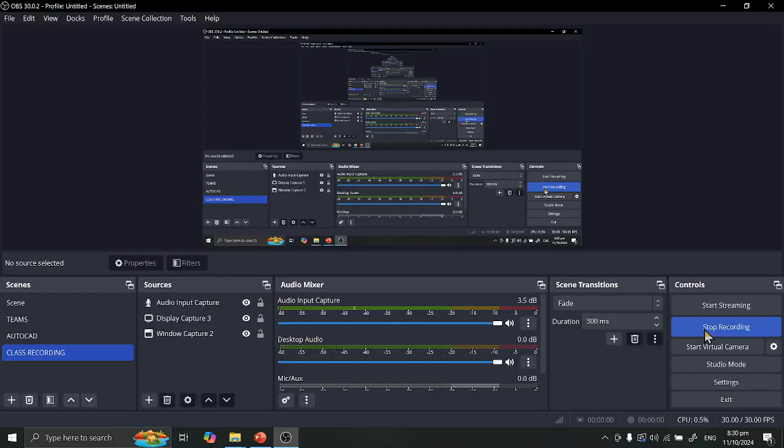Okay, to carry on with our discussion, we have sample problem number 1. So this is our situation: when the total pressure acting at the mid-height of the consolidating clay layer is 200 kilopascals, the corresponding void ratio of the clay is 0.98.

When the total pressure acting at the same location is 500 kilopascal, the corresponding void ratio decreases to 0.81. So three things are being asked. First, we have the compression index, which in our notation is CC. Second, compute the void ratio of the clay if the total pressure acting at the mid-height of the consolidating clay layer is 1000 kilopascal. And then the coefficient of compressibility, which is our A sub V.

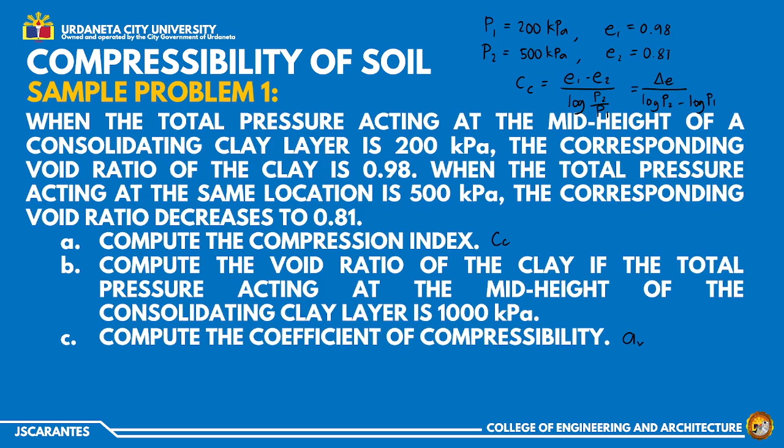For the last part, what is being asked is the coefficient of compressibility, that's A sub V. We said A sub V can be expressed as the change in E divided by the change in P.

Pagdating kay undisturbed clay, meron tayong formula for CC: 0.009 multiplied by LL minus 10. Dun din pasok yung paggamit ng given na LL. Take note sa mga problem, kadalasan kailangan natin magamit yung mga binigay talaga. Actually, most of the time, lahat ng binigay na given is nagagamit talaga.

Pero mag-ingat pa rin kayo, kasi meron pa rin mga klase ng problem na nagbibigay ng given pero hindi naman kailangan gamitin. Yun yung mga tricky type questions. Doon natin magagamit yung LL na 40%. Salpak lang natin dito: 0.009 times liquid limit na 40 minus 10. Yan is for undisturbed clay. Type lang natin 0.009 times 40 minus 10, we have sakto 0.27.

And then, okay na. So, pwede na tayong mag-substitute dun sa ating main formula. So, CC natin ay 0.27.

And then dito pala kay thickness. Pagdating kasi kay settlement, medyo maliit lang yung values nito. Kung papansin nyo, ginamit natin na unit for the height or thickness ng layer is meters. Kasi pag settlement ang pinag-usapan, sobrang liit niya. Kadalasan, para mas maging appreciable yung value, minsan nilalagay natin naka-cm or naka-mm. Pero dito, para mas sure na lang, gagamit tayo ng naka-millimeters na lang.

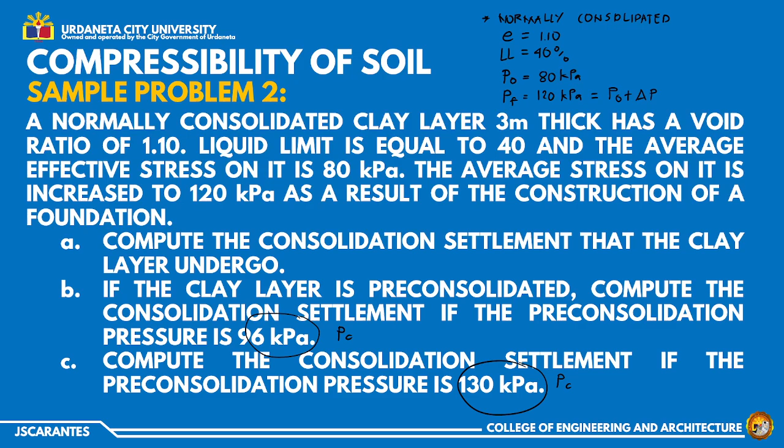Si CS, wala ulit na banggit. Pag walang nabanggit, di ba meron tayong note, binanggit natin yung formula ng CS: if ever hindi given or walang information about swell index, it is taken to be equal to CC over 5, or 20% ng compression index. Ang compression index natin, ito siya, 0.27. Divide natin yan ng 5, this is 0.054.

Salpak natin doon sa ating formula. SP is equal to... ganun, tulad ng ginawa natin kay part A, naka-mm na lang para mas appreciable yung value na mapalabas natin. H over 1 plus 1.1, multiply natin ng CS na 0.054, logarithm. Ang PC natin ay 96, divide natin ng PO na 80, plus CC 0.27 logarithm PO plus delta P 120 divided by PC na 96.

Solve lang natin ito. And that is equal to 43.489 millimeters, so that's our answer for part B.

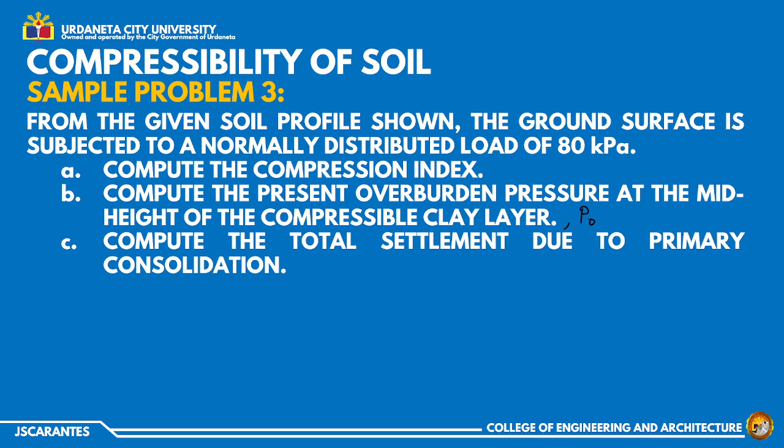For normally consolidated, mag-next slide na lang tayo. For part C, SP pa rin under normally consolidated: CC H over 1 plus E, logarithm of PO plus delta P over PO. Ang CC natin, nahanap natin kanina, that's 0.288, and then thickness ng clay layer. Sa figure natin, take note, yung H na ginagamit natin, huwag kayong malito: kapag PO, hanggang mid-height lang, pero sa formula natin ng SP, yung H na nandun is yung total thickness pa rin ng clay layer, so that's 4,000.

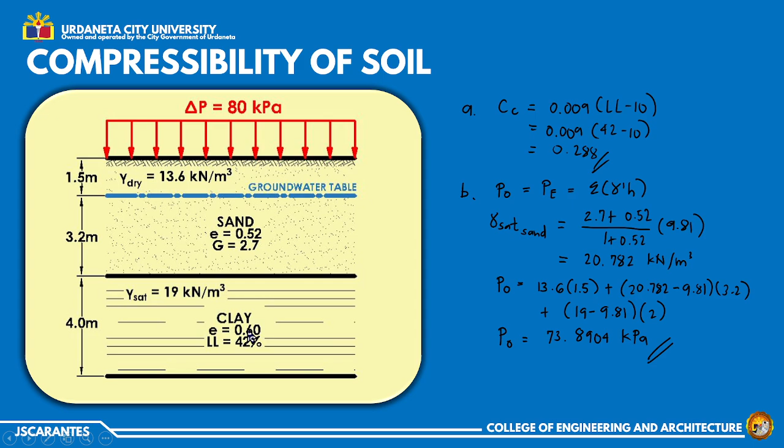Divide natin ng 1 plus. Tingin tayo syempre kung alin yung layer na kinoconsider natin, which is the clay naman, so gamitin natin yung E ng clay, wag yung E ng sand. Use E is equal to 0.60, logarithm. Ang PO natin, ito yung na-compute natin, we have 73.8904.

Dito natin ilalagay yung ating delta P. Ang delta P natin, according to the problem, is equal to 80 kPa. Para sa units naka-kPa, and then divided by PO, 8904. Type lang natin ito: 0.288 times 4,000 divided by 1 plus 0.6 logarithm of 73.8904 plus 80, over 73.8904.

Medyo malaki yung value since medyo mataas din yung thickness. 229.4089, let's just put 9 here, so ito ay mm. Yan yung ating answer for part C ng ating problem number 3. I hope nasusundan naman.

Let's try another. Problem number 4: the details of two footings and the soil layer beneath them are shown in the figure. Yung figure natin nasa next slide. Compute the stress increase at the center of the clay layer. Assume that the pressure beneath the footing is spread at an angle of 2 vertical, 1 horizontal. Ito yung ating rectangular stress distribution. Tinatanong ang stress increase, so pag sinabing stress increase, yan yung ating delta P, syempre.

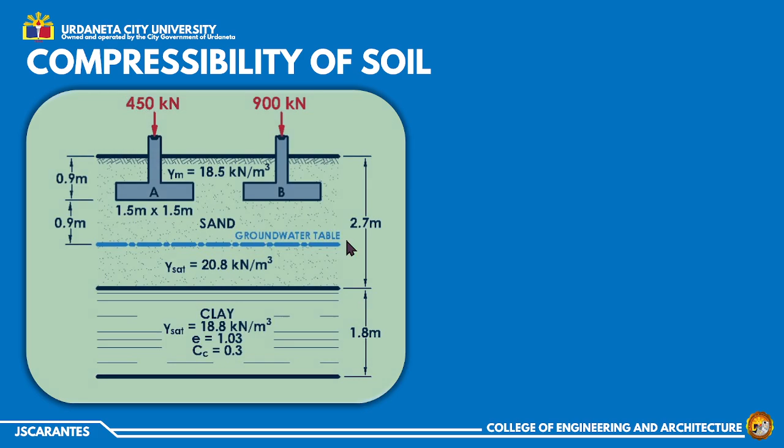So we have 51.282, wala namang butal na, that's kPa. Pwede tayong gumamit ng SP under footing A. Meron naman ng thickness, meron ding E, meron ding C, nandito yan lahat kay figure. 0.3, 1.03 for the void ratio, 1.8 thickness ng layer. So buong thickness ang gagamitin, 1,800 divided by 1 plus 1.03, logarithm. So ang PO yung na-compute natin, 51.282.

At since kay part B ang ginamit nating delta P is 25.51, adapt na lang natin yon: 25.51 divided by PO na 51.282. Compute natin ito.

Is equal to 46.6451, so 45 na lang, that's millimeters. So yan na yung answer natin for problem number 4.

At I think, meron pa tayong last example dito, problem number 5. May figure din ata, so meron nga. Dito, a rigid 3 meter square footing is shown in the figure. The bottom of the footing is 1.2 below the ground surface. So compute the elastic settlement.

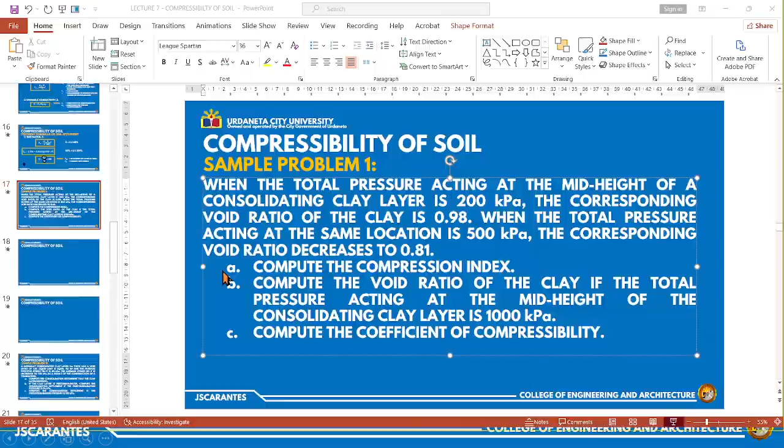so for this problem, siguro gamit na lang din tayo ng average, no? Since nagamit naman natin previously si direct na formula for delta P. Ayusin ko lang konti.

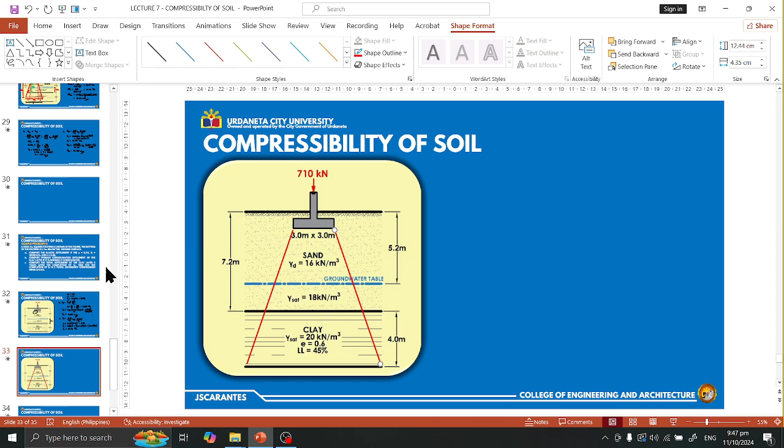Medyo tagilid, no? Pero gamit na lang ako ng line siguro. Mag-insert na lang ako. Ba't ko ba pinapahirapan ang sarili ko? From here to here, sagad na natin siguro sa gilid, no? Then gamit tayo kulay red, kapalan lang natin. Copy natin, mirror ko. Okay na siguro yan.

So ang ating slope dito, 2 vertical, 1 horizontal. Siyempre ganun din sa kabila. Para magamit naman natin yung isa, since nag-direct na tayo dun sa ating previous problem, gamitin naman natin dito yung naka-average. So yun naman yung gamitin natin sa equation, no?

So compute natin ulit: delta P at top ng clay layer, delta P at mid ng clay layer, and delta P at bottom ng clay layer. Ang mga formula nito, that's P over B squared.

So ang P natin is 710 kN. And then divide natin. Di ba ang B, in-express natin to as equal to the width ng footing plus dalawang X, sa triangle natin kanina. Pero sabi ko ang shortcut, yung 2X na yan na mismo yung depth.

So depth from bottom of footing. Kung dito tayo kay top layer, lagay ko muna, ang width kasi ng footing natin is 3 meters, dagdagan na lang natin. So from the bottom ng footing until dito kay top ng clay layer, so ilan ba yan? Meron ata sa problem binanggit. Ang depth ng footing, I think that's 1.2. So the bottom of footing is 1.2 below the ground surface.

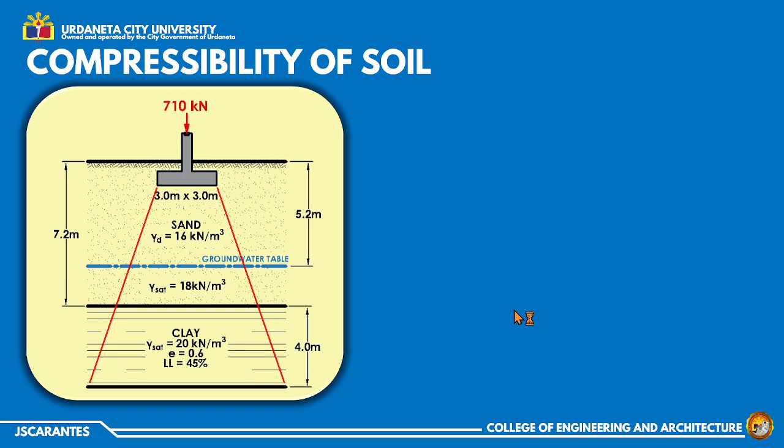For our SP, ang CC natin ay 0.315, multiplied by thickness ng clay layer, 4,000 mm, divided by 1 plus void ratio ng clay layer, 0.6, logarithm. So ang PO natin ay 119.96.

Plus delta P na na-compute natin, 6.073. Kanina ginamit natin yung recta. So ang ating primary consolidation settlement ay 4,000 over 1 plus 0.6 logarithm 119.96 plus 6.073 over 119.96. We have 16.8901, so 890 na lang, in mm. Yan na yung answer natin for part B ng ating problem number 5.

Part C naman, sabi sa problem, compute the total settlement of the clay layer, 5 years after the completion of SP. Dito tinatanong si total settlement. Pag sinabi nating total settlement, that's S total, basically ito yung summation ng tatlong settlement natin, that is the SE plus SP plus the secondary SS.

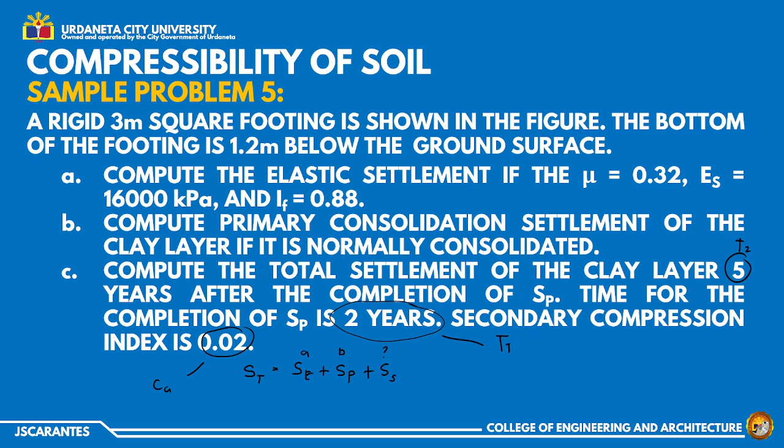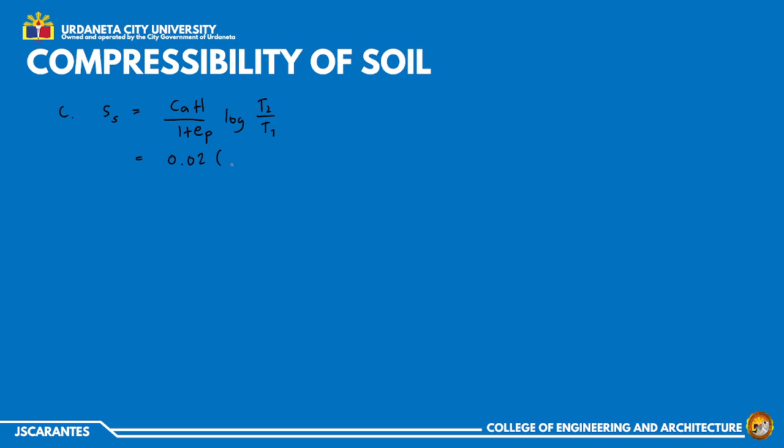Balik tayo doon. Dito ang ating CA ay 0.02. At ang H natin, syempre, yung thickness ng clay layer pa rin, we have 4,000 divided by 1 plus E sub P. Dito, wala pa pala tayong value ng E sub P, try natin compute yan.

When we say E sub P, this is the value ng void ratio at the end of primary consolidation settlement. Or we express this as the initial void ratio minus the change in void ratio. Ang delta E sometimes is computed using the formula na CC logarithm PO plus delta P divided by PO. Yung ating initial na void ratio, nandun sa figure natin, 0.6.

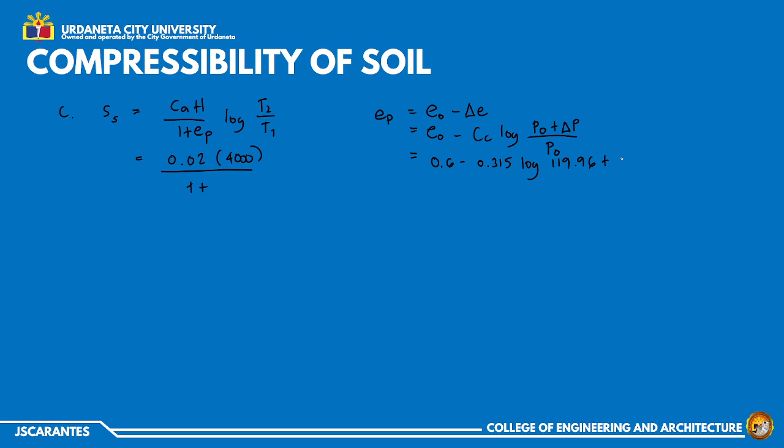Umpitin na lang natin si E sub P muna. 0.6 minus CC natin, na-compute na natin yan, 0.315 logarithm. Ang PO natin ay 119.96 plus 6.073 na delta P divided by PO, 119.96. So E sub P, compute lang natin, this is equal to 0.5932, or 593 na lang.

Yun yung ilalagay natin dito, 0.593, and then logarithm. Ang T2 natin is time after, that's 5. Time for completion of SP, that's 2. So for the secondary consolidation settlement, 4,000 over 1 plus 0.593, logarithm 5 over 2, we have 19.984 mm, so 984 na lang.

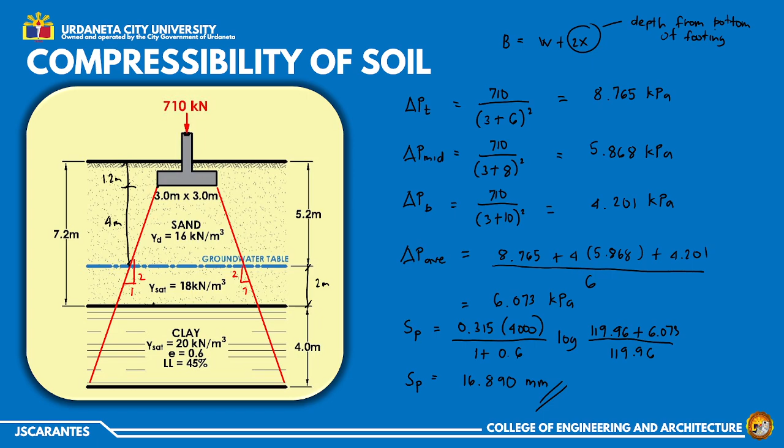Yan is yung secondary settlement. Ang tinatanong kasi is the total, so pag-add lang natin sila na ba yung mga na-compute natin kanina? For the elastic, that's 11.684. For the primary, we have 16.89. And then last, for secondary, 19.984.

Dito mapapansin ninyo, sabi natin ang pinakamalaking value dapat si primary, kasi nga siya yung primary. Pero dito, kung papansin ninyo, the time for the completion ng SP ay 2 years lang, pero mas marami yung time after the completion. Possible din yun kasi merong time factor pagdating kay secondary. Siyempre mas maraming years after the completion, mas malaki rin yung naprroduce na value na secondary.

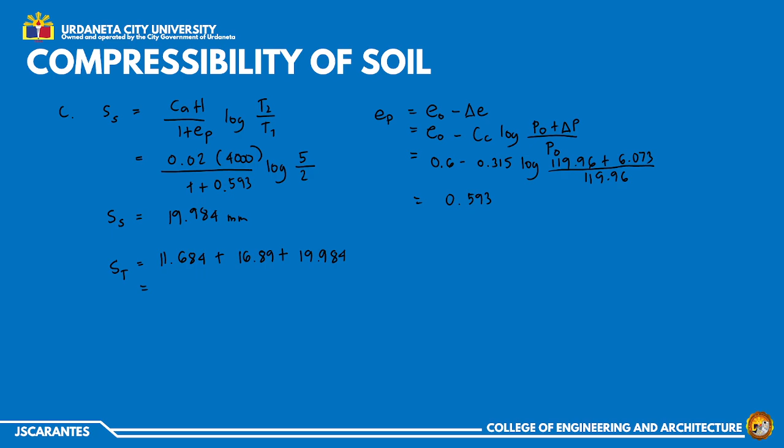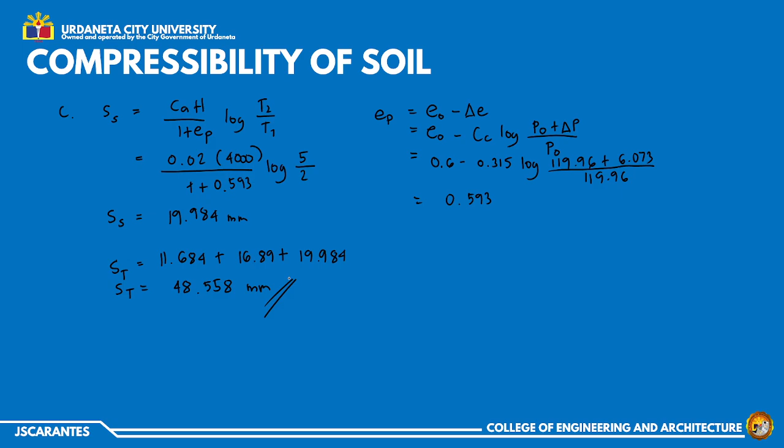So total lang natin ito: 11.684 plus 16.89 plus 19.984. We have 48.558 mm. So that's the total consolidation settlement, and that is our problem number 5.

So that ends our examples for this lecture video. Konting analysis lang, then practice lang din ng problem. Dito naman, majority actually is formula based lang, I think siguro practice lang then concept familiarize lang. Wala namang magiging problema pagdating sa pagsasolve ng problems natin on this topic.